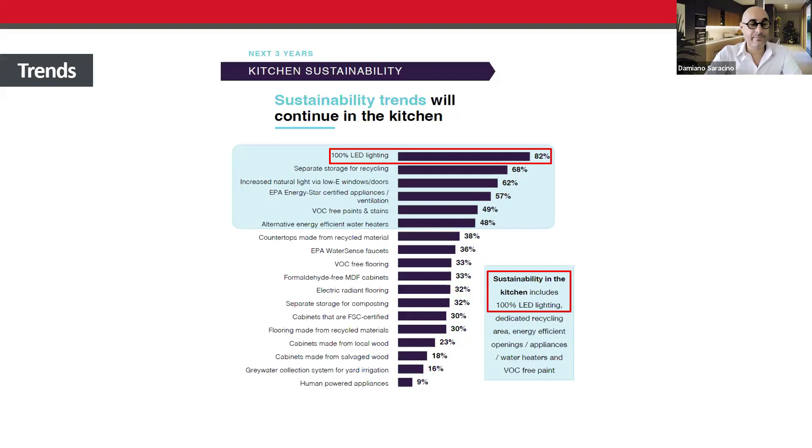Let's keep layering in mind, because it's important to understand how lighting is growing in our business. Kitchen sustainability is something I throw in there - 100% LED lighting, we're at 82%. Thank God for that. For those still using halogen or fluorescent lights, please give LED a chance for many reasons. Sustainability in the kitchen includes 100% LED lighting. I don't wish anyone to keep working with halogens right now for any reason - way too hot.

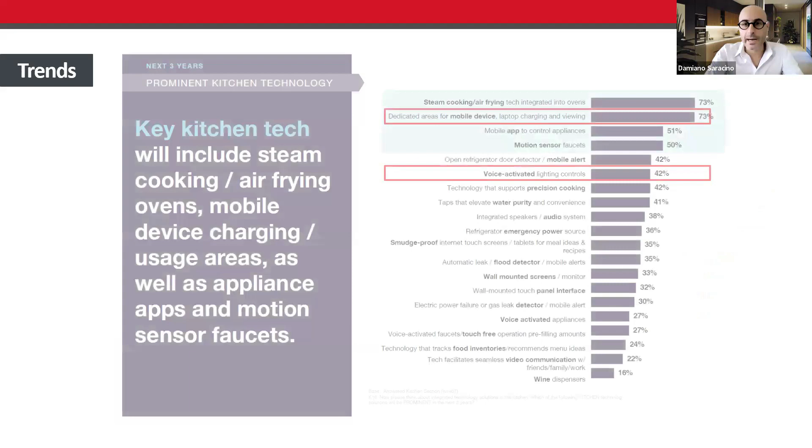Prominent kitchen technology, same thing - we're looking at dedicated areas for mobile device charging at 73%. That is a very, very high demand. And look at voice activated lighting controls at 42% - that's almost 1 out of 2 who would like to have a voice activated lighting control. Well, I don't blame them, we're in 2023 after all. We talk to our phone every day, we talk to Alexa and Google Home every day, we talk to our cars. We're not talking to our lights.

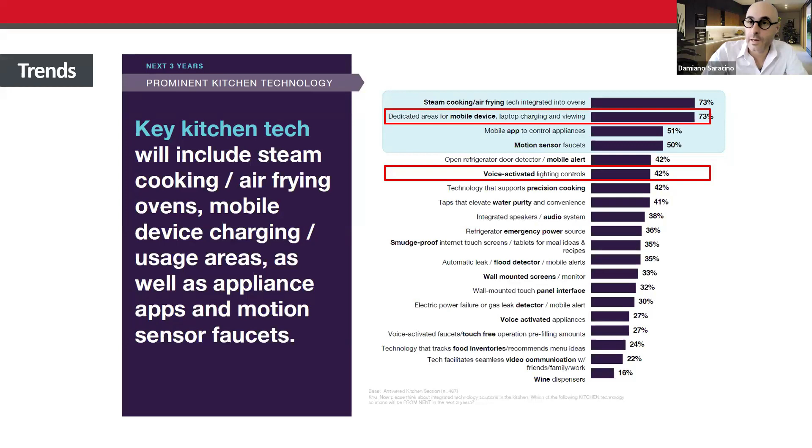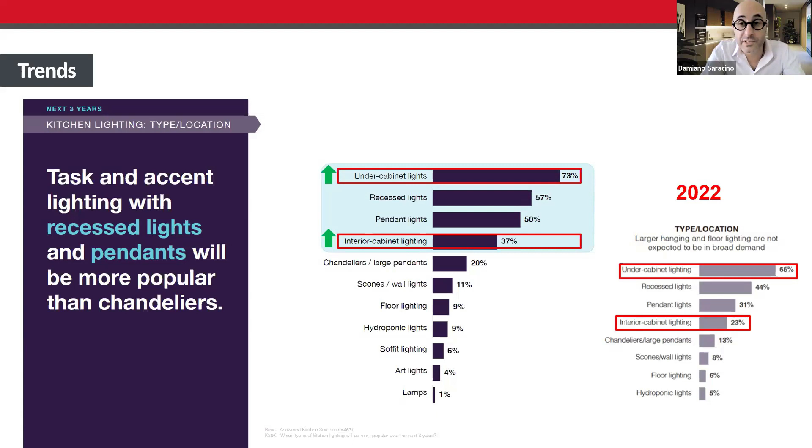But remember the layering or levels I was telling you about before - as an example, interior cabinet lighting, level 2, last year was at 23%, this year is up at 37%. I would really love to see that number by the end of this year or next year to be at least 50%. That's the direction we're going.

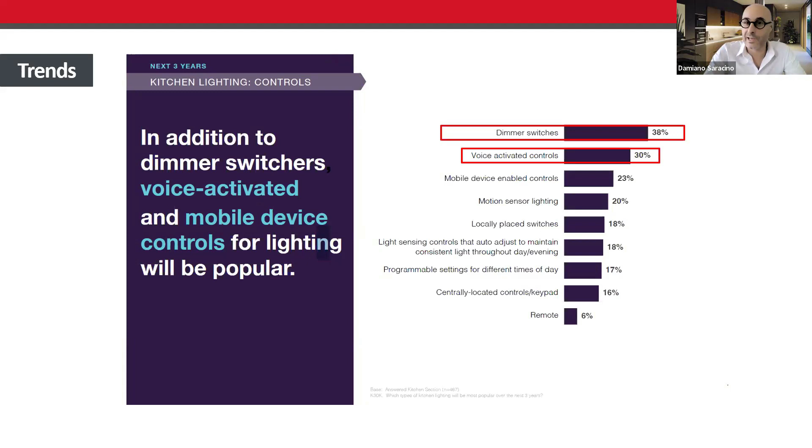Dimmer switch and voice activated controls - I left this here because I wanted to show you how close the ratio is now of those who would like a dimmer switch, a wall dimmer switch that requires electricians, wiring, going behind the walls, compared to a voice activated control - there's only 8% over 30. Very, very close. I remember dimmer switches being actually a little higher than that. But another thing to keep in mind is this thirst for having technology and innovation in our kitchens.

Very important to understand here is the difference between 12 volts and 24 volts in terms of a lighting system. What is the difference between a lighting system in 12 volt and a lighting system in 24 volt? First of all, 12 volt is what we've been using for many, many years - as a matter of fact, LEDs were born on 12 volt. Consider that very, very low voltage. And they did that because it was safe for everyone to use - you can touch 12 volt, nothing is going to happen.

But it's considered very low voltage up to 50 volts. That means if we increase the voltage a little bit more, we're still using a very, very safe system. However, because of the reasons I'm going to tell you, it became the newest, best system on the market.

24 volt greatly is a much better system than the 12 volt. Let's see why. First of all, what is the voltage? Consider it has the pressure. I always use the example with water. So imagine water in a siphon, water in a pipe.

If we open the faucet on one end, we have a certain pressure that pushes the water a certain distance from that faucet. What happens if we increase the water coming out of it? I open the faucet even more, I increase the pressure, so the water goes further distances.

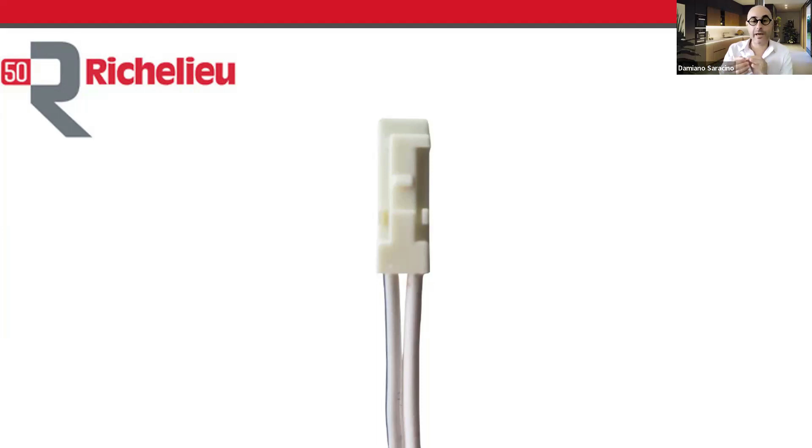Nothing bad should happen. On the other hand, the cable that sticks out of the product is all 79 inches long. Weird number, but let's remember we're talking about Italian products here, okay? All these products are designed, engineered, produced in Italy, so we'll see a little different taste as well, different look. So 79 inches is the equivalent of 2 meters. So for them it's standard, for us it's an odd number. 79 inches, every cable, every wire attached to our products.

And at the end of the 79 inches, we find what is called a Micro24 connector. What do you notice about this connector is the fact that it is the same diameter as the actual wire. So wherever the wire passes through, the connector can pass too. And it is already attached.

For that reason, many of us worked with systems before where the clip was disconnected. Why? Well, because it was probably too big, because we have to conceal these wires. They have to go in very tight spaces. If it was already connected with a connector as big as my finger, then it would have been hard to have that cable pass through. So what they do, well, they make their life easy. They give you a spliced wire with a bunch of clips, and then you have to go in and try to clip yourself or attach yourself. Wouldn't it be much easier if that clip is already on? It's a SKU less that you have to purchase, it's a few extra minutes that you avoid in terms of labor. And guess what? I think we'll have a lot less chances something bad would have happened.

What if you invert the polarity while you're doing it? What if you mess up with one of those two little wires when you do the connection? Anything can happen while we start doing things. How do we solve, how can we avoid anything bad happening? Get the stuff already taken care of. Clip already on, wire already attached. That is the perfect definition of plug and play.

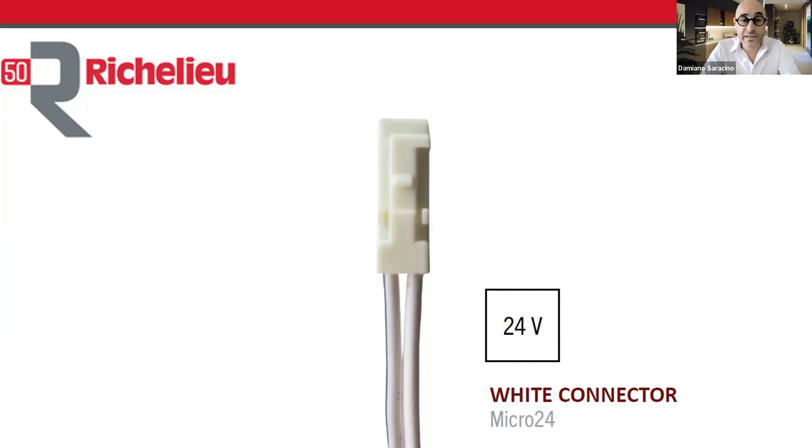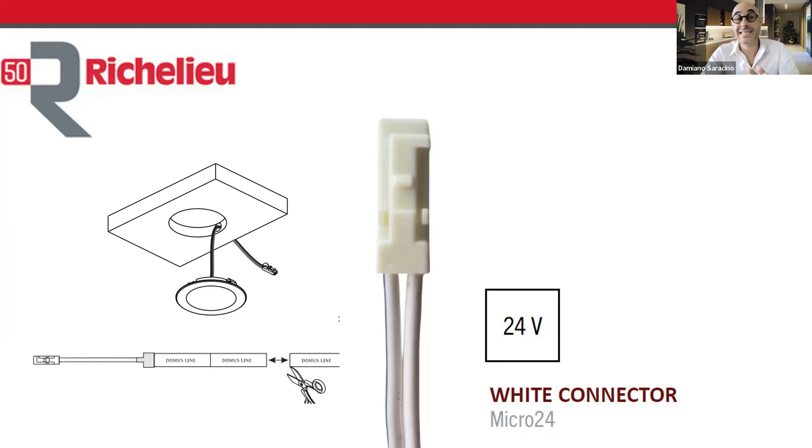So at that point, again, as I was saying before, either if we're looking at a puck light or a strip light, these wires are already connected. 79-inch cable. They pass through any little tiny channel that you drill or in between cabinets, and you're ready to go. This is going to be the fastest, simplest, safest, problem-free installation you ever had with an LED product.

Then we're going to a tunable white experience. Tunable white is a term that this Italian manufacturer came up with about 5 years ago for a system of light that is able to change temperature. So the same puck light and the same strip light can be used in different temperatures, what we call measured in Kelvin, right? Warm white, natural white, cool white, 2700 Kelvin, 3000 Kelvin, 4000 Kelvin, 6000 Kelvin, okay? These are all familiar terms for some of us.

So at the base of the tunable white system, there are two very important reasons. One is a practical reason. Why do we have to carry 3 times the amount of products? We have to carry the same puck light in warm white, the same puck light in neutral white, the same puck light in cool white, the same strip light in 3 other different temperatures. Wouldn't it be a lot easier for us to stock only one that you can then use in any application? You want a warm white, set it on warm, send it out. You want it on cool, set it on cool, move it.

You want to change it, here's the remote, here's the app, here's your voice to change different temperatures. Which brings me to the second most important reason behind tunable white, which is really the core: for the first time we can offer our clients the possibility of living in an environment that has a lighting temperature that matches what they're doing, their activity.

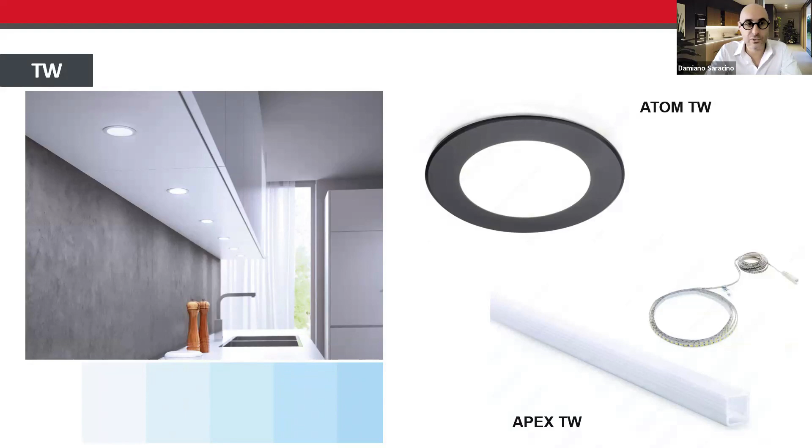Guys, this is so important that you will see from this year on, every light on the new generations, every new product that comes up will probably come with this particular skill to change different temperature. It will become a thing, it will not be an option anymore. In the next couple of years we'll see this trend consolidate. I don't see, a few years from now, the need of purchasing a light that is only warm or only cool, when we understand how easy it would be to match these temperatures to our daily routine. So that's why it was important. I wanted to spend an extra minute here because it's really a good look ahead to what's going to happen to these LED products.

And then we go to one of the most important and interesting parts of this presentation: the silicone generation. The very first silicone tape came into the United States back in 2018. It was the SEH4. The SEH4 is a tape that is enclosed, surrounded by silicone casing that gives it flexibility, protects it from damages, and protects it from some water too. It's not waterproof, it's water resistant.

So let's look at some of the main points of this tape. The main one, the one I bring up right away, is the fact that it's one piece, it's all in one. So let's think about how you usually do a lighting application. One is linear: you'll need a heat sink or an aluminum profile, you'll need a diffuser so you don't see all those dots or the dust and debris going into the light.

Then you need end caps, because the cut is going to be rough, and you want to close that. Then you will need the tape that goes in there, you'll need some kind of support clips. These are all SKUs that you guys are purchasing right now individually. Then you need the lead cable, the clip. So we're already at 7, 8 different parts, and we didn't even start with power supply and everything else. Just to make a vertical or horizontal linear, you're currently purchasing 6, 7, 8 different parts and pieces, and then you have to put them together.

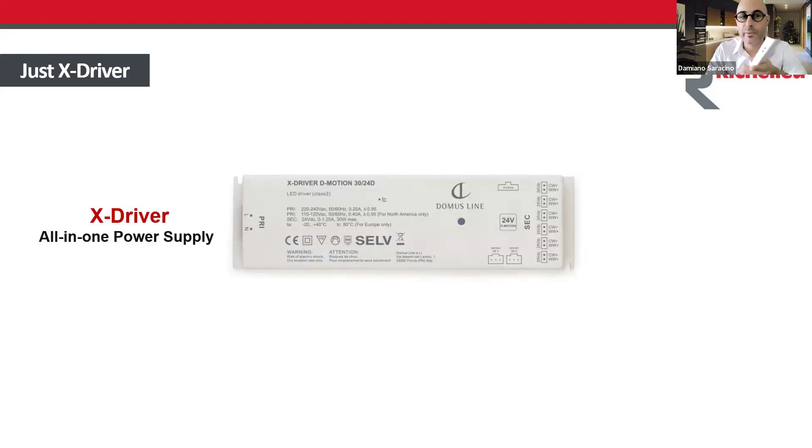It's also an all-in-one power supply, because all we really need is one of the two little modules that are internal. They don't take any other external space like some other competitors or lines out there in the market. Our modules go right inside of it and take no space. We have two different modules, two different brains we can add to our X driver—one is a wireless module, the other one is the Wi-Fi module.

After that, we simply click in our lighting products on the front. Here you have all the different ports.

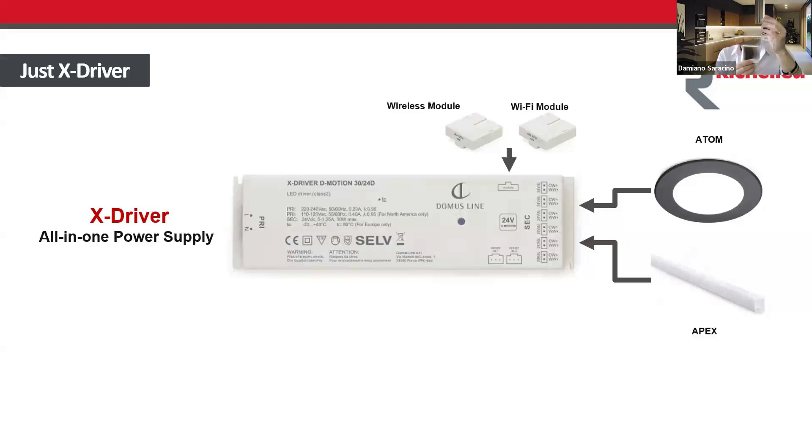You have a small power supply, you might have little ports. The bigger you get, the more ports you'll have. We have 15 watts, 30 watts, 60 watts, and in a couple of weeks we're also going to have on the shelves the 96 watts. Even if this is a 96 watts, guys, you see it's still 3/4 of an inch, maybe a little longer, but 96 watts. It's a lot of watts.

So what can we do if we put in the wireless module or the Wi-Fi module? That module that we just put into our power supply is nothing but a receiver. Instead of being external, surrounded by wires like we have it today, it's wireless. So once we click it in, the entire power supply becomes our receiver.

Now we can use 1-zone remotes, 3-zone remotes, but what is really trendy today is the usage of wireless products. The last two, the IRWI and the PIRWI, they are the first wireless sensors on the market. How do they work? Well, they connect via radio frequencies with the receiver that we plugged in.

The first one, the black one, the infrared, has two functions. For example, it could be your on-off switch dimmer, function 1. You sync it to the power supply, wave on to turn on the lights, wave in front of it to turn them off, hold your hand to increase and decrease the brightness, and we can put that underneath our cabinets, on the side of our vertical panel for the fridge, anywhere. It's wireless. We can pick any place where we want it.

The second function of the same product, you can switch from one function to the other with a simple click on the back. It's now your door switch. Open the door, light goes on. Close the door, light goes off. Yeah, we already had those products before, but this is wireless, guys. It works with a watch battery that lasts for a couple of years.

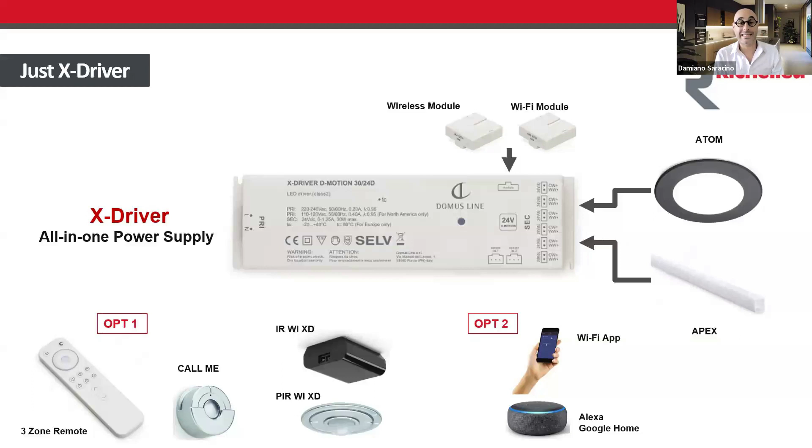So this is the direction that we're taking, the organic direction with these lights - lights that are extremely easy to install and purchase.

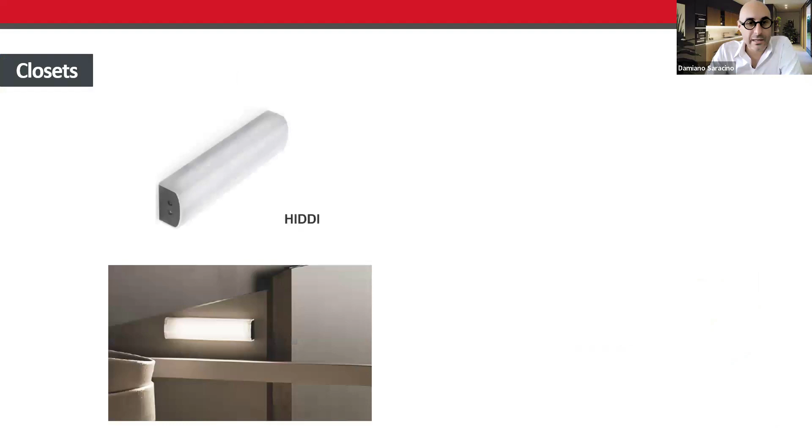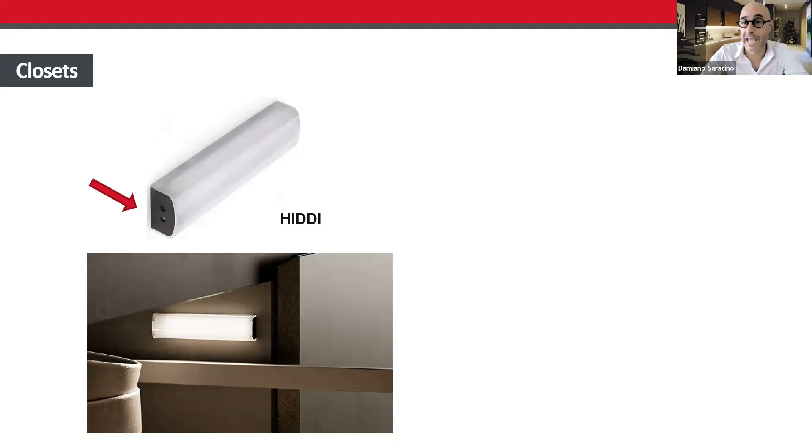And that's what we need to illuminate any cabinet that has a door that turns on and off. Those are the proximity sensors that I showed you before. So let's wrap this up - we are down to a selection of products that can be counted on the fingers of my hand.

So number 1, make your custom line - you decide what you'd like to put in, make your own combination. After that: one linear, one puck, select the power supply based on how much wattage we have - if we always use a lot of wattage, 30, 60 - control the module however you want, wireless or Wi-Fi, and at the end, the accessories. Pick whatever sensor or button, or nothing if you want to use the Wi-Fi and the app, because I assume you already have a phone and your Alexa. That will actually save you some money, believe it or not, offering probably the latest technology.

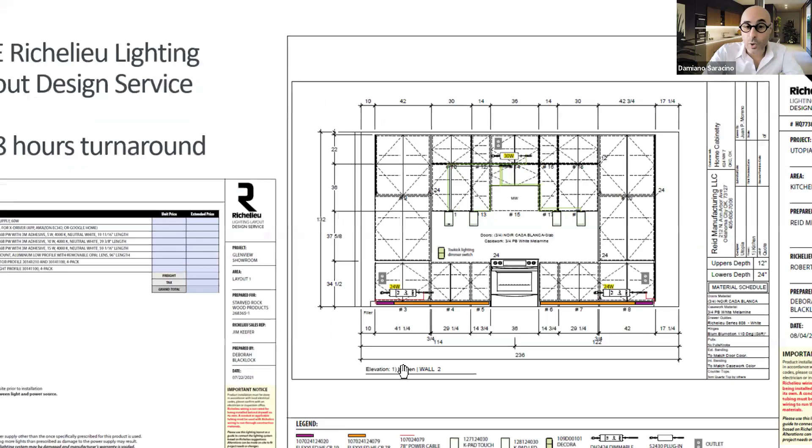As you can see here, we draw all the solutions. There's a legend, so you see what we're talking about with the codes and everything else, all the wires. We calculate the watts, we calculate the extensions if you need any, and we create the part list - you need one of these, two of these, three of those, four of those.

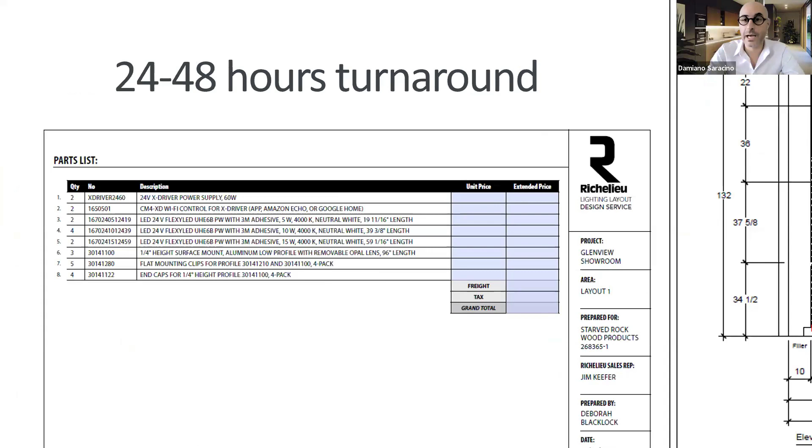At that point, you know exactly how much it's going to cost, you know exactly the parts that you need, and if you have a good rep, you will also be able to put it in your cart on Richelieu.com. So you'll have it right there. Log in, go to your cart, Mrs. Smith Kitchen is right there. This is the total. Purchase now is all you have to do.

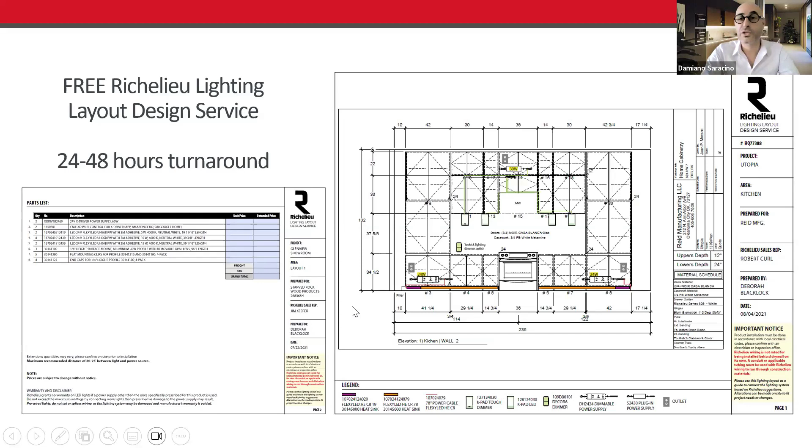Okay, so this is all I have for you guys today. I hope you enjoyed it, I hope it was educational for you, because that is really what I was aiming at - to really show you that there is a whole different universe of LED lights out there that we might not have known about, and using them will not only change drastically the way that you're doing business, but it will also change drastically the amount of profit that you could do with your products. Any questions?